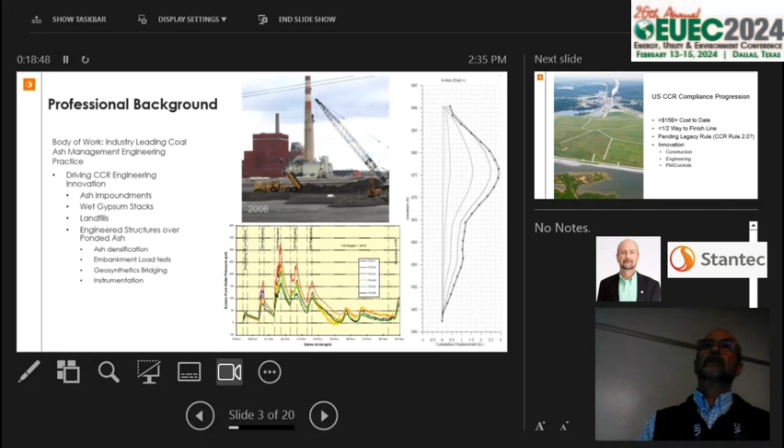Pretty well accepted today that when you load up saturated ash, you get tremendous pore pressure spikes, which is not good, but it does dissipate relatively quickly. The graphic on the right is where we're just monitoring as we built. I think this one, we could just call it a test pad. As we built out test pads on sluiced ash, the deformation, if you will, through an inclinometer. So from that background, this really took off seriously when the Kingston failure occurred, and we were the engineer of record for the Kingston Recovery Project.

So the compliance progression, where are we today? By some accounts, don't hold me to this, we've now spent $15 billion in CCR compliance, mostly driven by the CCR rule. I'd speculate that we're probably halfway there. Well, at least we were halfway there. Now we have the legacy rule. Maybe it could come Q2 2024, and we start over. We go back, dig out, do all the compliance demonstrations. I don't know what you guys are seeing, but I've heard accounts of over 1,200 legacy units now coming down the pipe. Business is good.

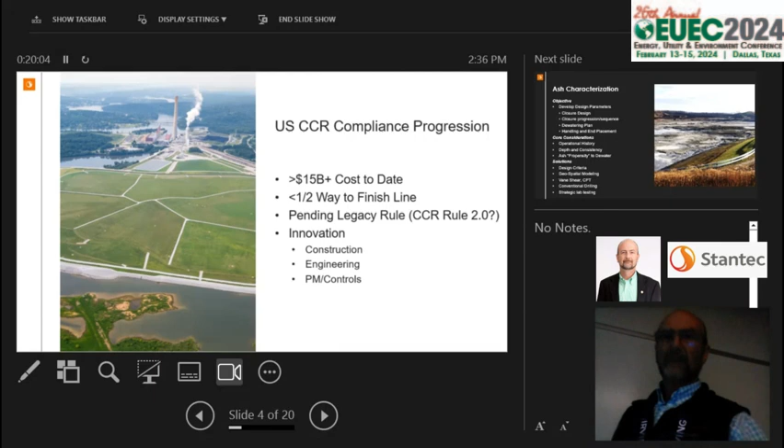So I'm going to try to focus on those elements that I laid out, the innovation that we're seeing also in construction, in the engineering process, and in the project management and controls. So you might want to help me with any of those because we're trying to collect them all, and they get away from us pretty quick. Ash characterization, the very first piece.

Yeah, you want to try to get the water off the pond. And then what you're left with is something that looks a little bit like a lunar landscape. The objective here is to begin to move from a lot of unknowns down through a funnel where you get knowns.

So it's develop your design parameters that feeds into your closure design, a sequence, if you will, start to work out how you can progress a facility from this to closure, whether it's closure in place or closure by removal, which hinges on a first step, which is a dewatering plan. It's not rocket science, dewatering, but we pretty much have a grasp around it now, and there's not much in the way of innovation, but you have a couple paths, and we'll get into that.

And then handling and placement, again, just take all that into consideration in that ash characterization piece. How does it feed into those ultimate deliverables, if you will? Some of the core considerations is the operational history. We try to leverage everything we can out of that. What coal, what was your fuel source? What emission controls did you have in place? How you operated the pond if you were sluicing? How often you moved your sluice pipe?

If you never move your sluice pipe, you will see an accumulation of this super fine fly ash at the furthest distance in the impoundment from the sluice pipe. That sometimes is a little problematic. At first glance, it all looks the same, but that's somewhat problematic material sometimes.

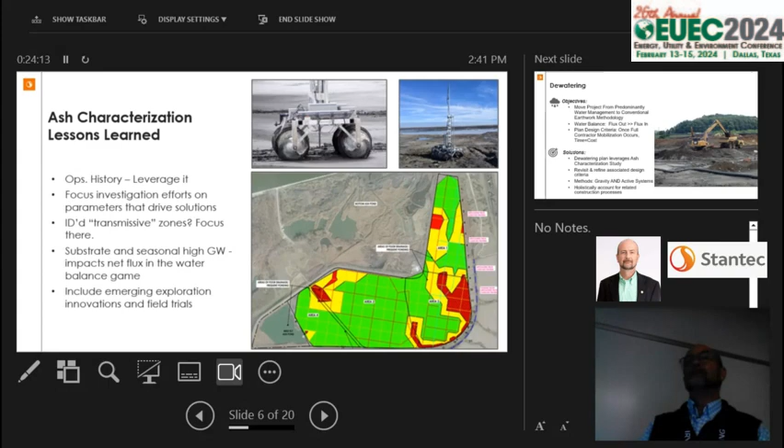Dewatering. The core objective is, these are predominantly water management projects. They don't look like water management projects, but that's really the focus. You want to move that into just conventional construction methodology, because that's really all we have. In terms of specialized equipment, what the construction industry has brought are amphibious excavators. Everything else looks just like heavy equipment on every other construction project. So you have to transition into conventional methodology. Let's see, let's fast forward.

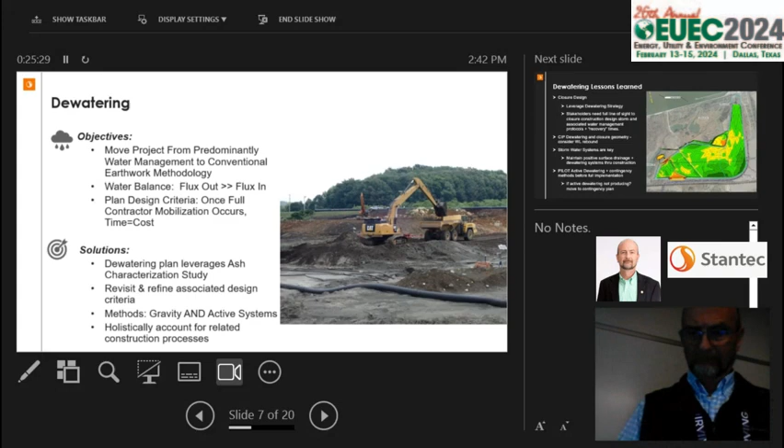On dewatering, definitely look at simplified gravity dewatering. You might call it passive, gravity dewatering, and active systems. It all depends on your constraints on time, but we're seeing a lot of success with, if you have time, beginning to establish positive drainage and letting gravity take its course. Lessons learned.

Let's skip to this rebound concept. For closure in place, this graphic represents another heat map, if you will, where orange and red are where the seasonal high is very close to our proposed subgrade. So here we're balancing all the material on site, bringing ash from the perimeter to the center with, you could call it a strange herringbone pattern, but in effect, balance on site, right? We're not importing anything except the actual cap.

But when you do that, these areas in red are where we currently have groundwater at a relatively high level. And for a contractor, that's where things get problematic. So you just want to make sure that the focus on dewatering is addressing your ultimate grading plan.

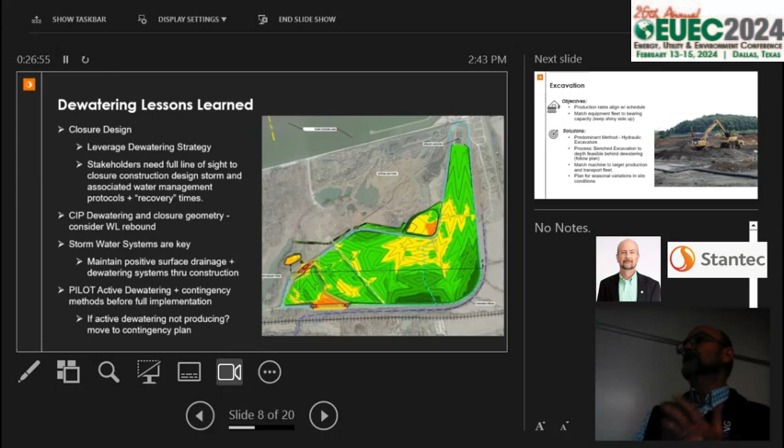One other good point is try to do a pilot on whatever your dewatering methodology is. Something in the field that is proof of concept that dewatering will stay ahead of what your needs are in terms of dewatering with time. They're relatively simple. It's pretty quick, right, to get a feel for: is what we're proposing going to keep us ahead of the dewatering game.

Excavation. Core objective here really is that your production rates align with the schedule. The owner might establish a schedule. Maybe there's some other influence from other stakeholders, but there is ultimately a compliance schedule on closure. The contractors typically want to match up their fleet to the allowable bearing capacity that you maintain during construction. In effect, we've got to keep the shiny side up, right, and keep this equipment upright.

Today's methodology is predominantly, most of the materials move with hydraulic excavators. And I'll get into this production piece in a little bit, but what you have to do is account for seasonal variability. Certain parts of the country, you can just roll. But in other parts of the country, seasonally, on some facilities now, we effectively just call it during the winter. There's a point where maybe you just need to stop burning diesel and wait till the weather comes back to you for conditions that are more favorable.

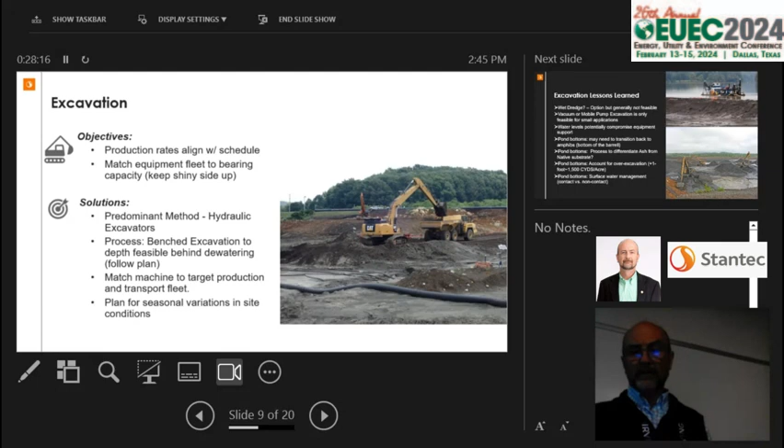Lessons learned. We've tried them all. Wet dredging? No, not really. You're not getting ahead of the water game. We did it at Kingston, but it was what we call time critical. We didn't have a choice. I've seen some vacuum, these piston pumps. It just feels like it's a toothbrush, right? Really low production rates, where for a specific application, maybe.

But I think one of the key elements here is that you have to continue the dewatering process. You don't typically just get dewatering done and then you're in the conventional construction method. Most of the time, you're progressively bringing the water table down as you're excavating.

A new one that we wanted to share was what we call pond bottoms. Despite what data you might have for pre-development, like what you consider, okay, this is where we'll be done, we'll be at the bottom of the pond. It's either inaccuracies there or just the fact that what if your substrate's gray just like the ash is? So you want to account for that, where just a foot is 1,500 cubic yards per acre of over excavation. So you want to maybe work that into your design criteria on how clean is clean, or how are we going to confirm we're at the bottom of the pond.

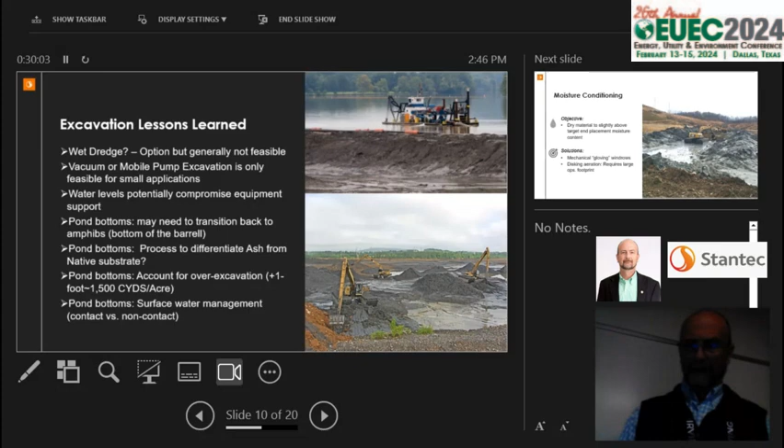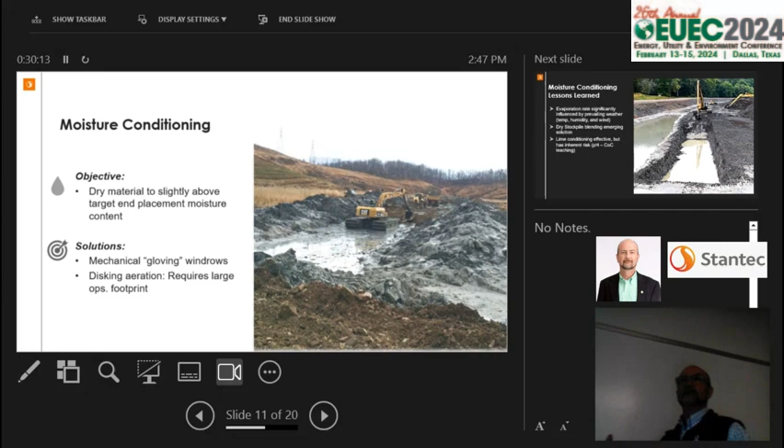Moisture conditioning. Here the objective is to move it from looking like this to something that you can handle as a solid. Lessons learned, I referenced it earlier, the evaporation rate that you're going to see is significantly affected by the prevailing weather. I can remember one afternoon at Kingston, I tried Googling weather science to figure out if there was an equation for this, but I never actually found it. But temperature, humidity, and wind all affect your actual evaporation rate. And if it's 40 degrees, it can look great out there, but we're not moving the moisture needle very much.

Lime conditioning, I think it is effective, but you always want to check back with your environmental group because a little pivot in pH can really get your chemistry out of whack on the groundwater side. I don't know if we have any geochemists here. They could explain that probably.

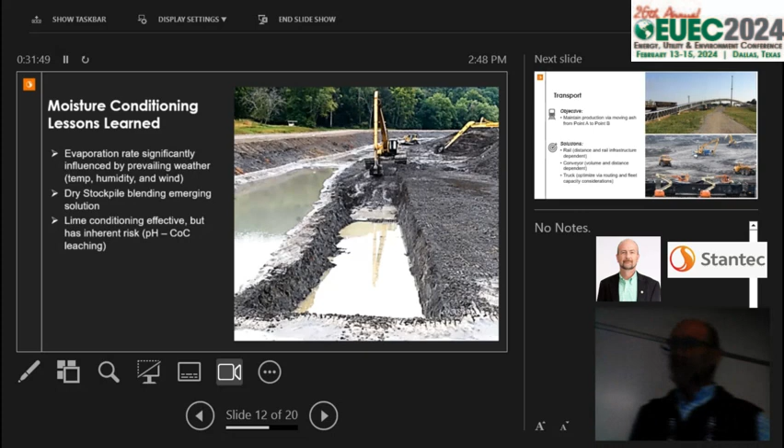Transport. Objective, got to move from point A to point B. Today our core options are rail, which we did at Kingston. Typically it's driven by, you're trying to move it a long distance.

Conveyors are now coming back into the conversation when we're looking at pivoting from what might have just been closure to, what about this beneficial use thing? Ash is a resource now. We're kind of changing our view of that. And conveyors provide some really interesting options as it relates to potential either short-term or long-term harvesting of the ash for beneficial use. Trucks, yep, we use trucks quite a bit. It kind of moves into that conversation about optimizing your fleet as far as keeping your production rates up.

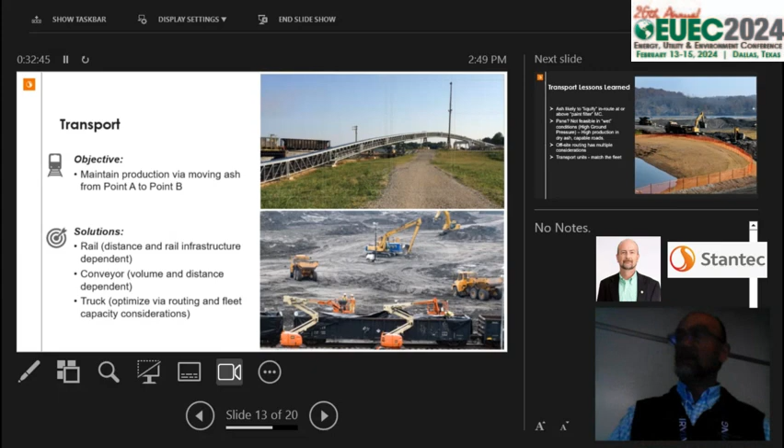Transport lessons learned: ash is still likely to liquefy en route when it's at, we'll just call it, paint filter. Paint filter is pretty accepted in the industry, but it does not work very well for ash in that when you vibrate ash at paint filter moisture, it basically will go back to a liquid state. We saw it in rail cars, we've seen it in trucks. So in the interim, you might need to move it at that moisture content, but if you're moving it a long distance, you need to be cautious there.

Conventional pans, what's the other word for pan? Scrapers? Yeah. I've seen people try it, but I think it's the ground pressure that gets them. We haven't seen it prevail as a transport method. Off-site routing has just all kinds of considerations. Anytime you're stepping outside, we'll call it the reservation, you got a lot to consider there. And for the number of units, they need to match your excavation fleet. There's a direct correlation between excavators and your transport units.

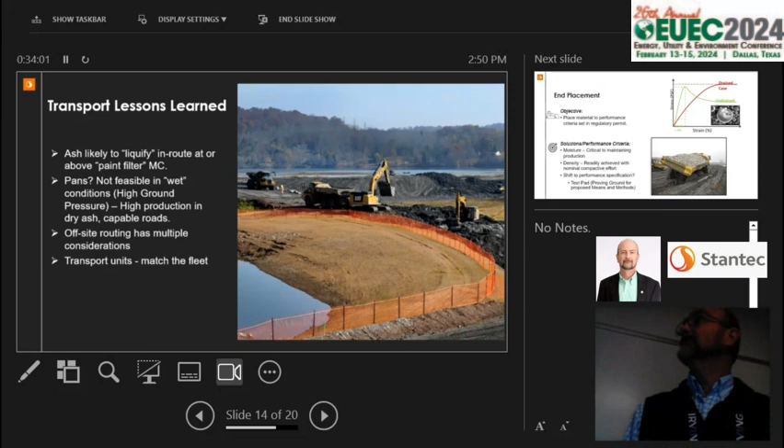End placement, of course, the objective is whatever your regulatory permit says. Is it closure by removal? Is it closure in place? But it's basically where does it go? These are basically the performance criteria.

What I would throw out, it's not very popular, I get a lot of criticism for this, but are we at a point now where we could shift to a performance specification where you could just do a test pad and the contractor demonstrates his ability to place the material and meet your performance requirements, and he follows that protocol? If you have a change in ash, if he changes his equipment, you do another test pad. As opposed to the full-time quality control like we're building a dam. We're not building structural fill, so it's just a consideration. Today it's predominantly full-time QC inspection.

End placement lessons learned: measurement and payment, in-place volume, not truck counts. Truck counts, you just have a guy at the gate holding the clicker. And sometimes he might be distracted, so he just hits his clicker. I think it's happened. So we've gone to now, and I know most of you may be doing it, using drones for our surveys of in-place volumes.

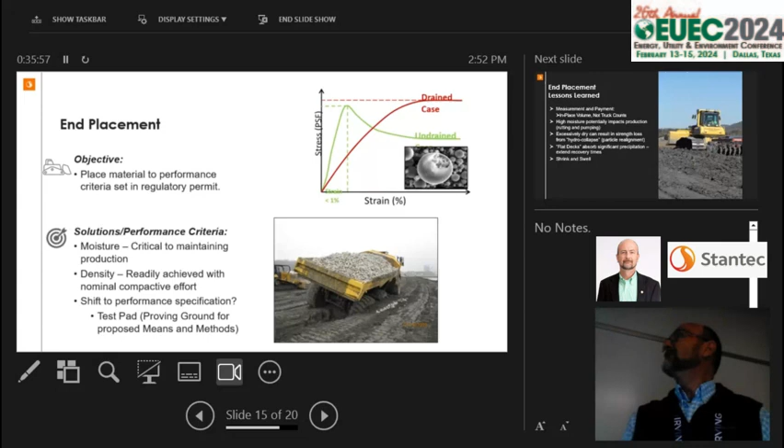The next one is the high moisture. It's pretty sensitive. I don't know if this curve illustrates it, but it really doesn't. The material is extremely sensitive to moisture, and you might be at a good point right after lunch, but if you bring in loads that tilt too far past optimum, you can find yourself in a real situation, because all these processes are going at the same time. And if this process shuts down, then what are you going to do with the material that's being transported where you can't keep your end placement going? All those cogs have to stay in motion.

The flat decks, when we're placing it, we have seen significant infiltration, if you will, and then the extended recovery time. So consideration that you're going to maintain positive drainage in your end placement area is pretty critical. And then shrink and swell. What's getting us now is cases where sluice ash occupies a certain volume, and in end placement when you're compacting it with that compactive effort, there's a delta there. And as much as anything, it gets back to measurement and payment. Think through that and have that sorted out with your contractors.

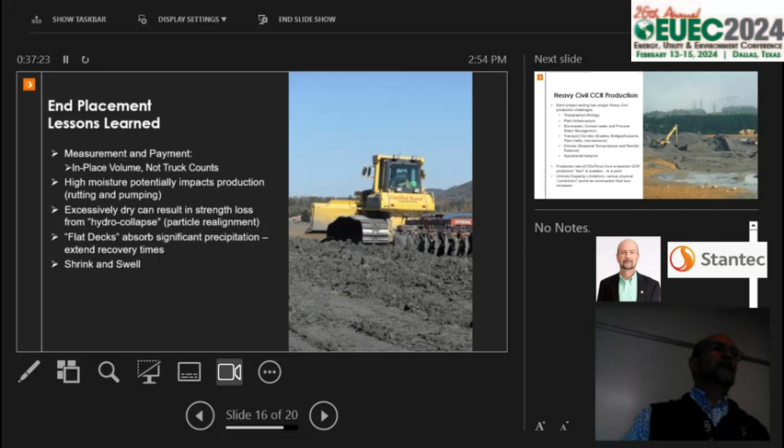Production. So all of the processes that I went through all come into this element of production rates. Moving ash, point A to point B.

In major projects, there's this baseline that's set based on an assumed fleet, and I'll expand on what a fleet is. And the ultimate capacity is limited by something in one of those processes that I went through. You reach these constriction points where, again, all these cogs have to keep turning. When you hit that constriction point, that's it. That is your maximum production for each site.

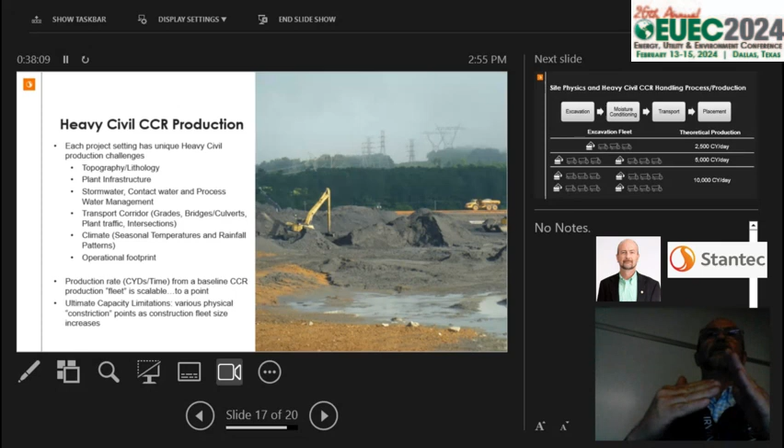So, basic fleet, 3 trucks and an excavator. Contractors like to use 2,500 cubic yards a day. I had 2 fleets, well, I'll get 5,000 cubic yards a day. And here is where it gets a little odd. I call it site physics. If you had 4 fleets, you're probably not going to get 10,000 cubic yards a day. You're going to hit one of these constriction points.

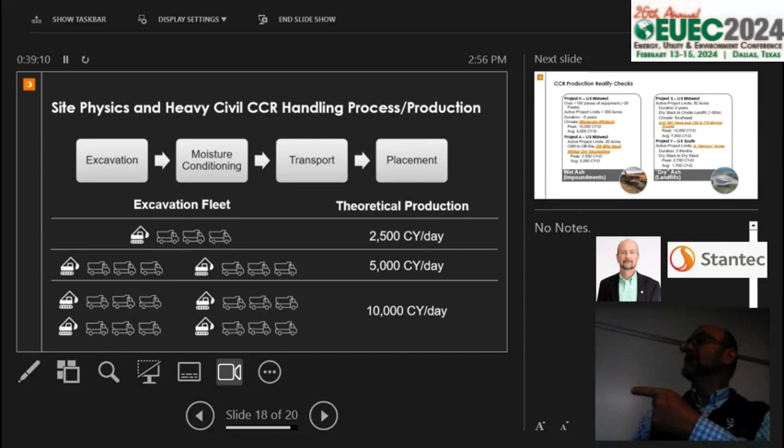It's either in transport or it's in moisture conditioning, but every site has these physics, and typically, if your construction team has experience, you'll know what those are, and you can kind of proof that. You might do some preemptive things to remove some of those constrictions, but we see this being pretty problematic. If your proposed rate was 10,000 cubic yards, that can be a problem.